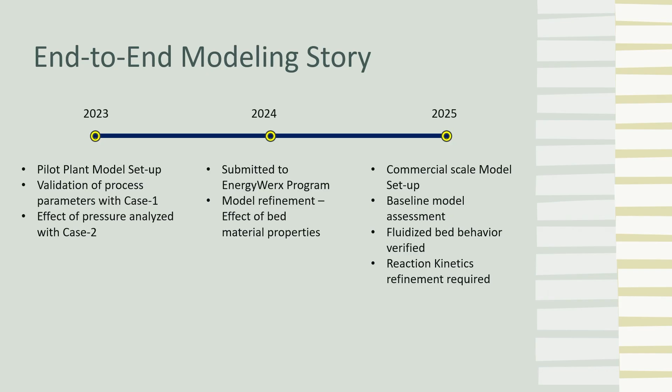And so there was a lot of model refinement, effect on the bed properties as they went through all this work. And now we've got to the point where we've got a reasonably good model of what we think that System 1000 looks like. But this talk is just sort of walk us through the process of what we did, how we did this, and what was the purpose of all this work that we put together.

So you may want to ask, why were we doing this? GTI has done these sorts of gasification plants for roughly 40 or 50 years. We have a lot of very basic knowledge of how it goes together. There's a lot of correlations from our friends at PSRI, who were part of GTI for the longest time. And this is technology that within GTI is very well known, and it's been established and it's been proven many, many times. What it becomes is a de-risking thing.

The question that we would always get from financiers is, show me that plant. Show me that 1,000-ton-a-day plant on biomass. Show me that 1,000-ton-a-day plant at 10 bar. We can't do that, but what we have is a lot of data around coal plants at 10 bar. We have a lot of data around coal biomass at smaller scale.

So using the work that we did here with CPFD, we're able to then begin building these models so that we can take these to the financial markets, partially as a scientific tool, partially as a marketing tool. They can start to see that what we know inherently about the systems, we can then model and we can validate these models and show that this is true.

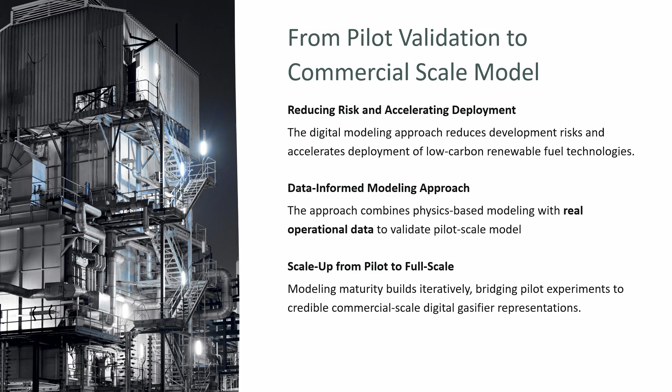So it was a data-informed modeling approach. We were using true operational data from heat mass balances from the work that we did at the pilot facility, and then we'd taken that to the scaling up of the overall full System 1000.

Okay, so why does this matter? So biomass gasification is very complex, as we saw with Eric. These are the same types of gasifiers. So I can say from our system, we're going through here, we're going into the POX system, and we're using an Arvos cooler. So I know very much what's going on between all these sorts of modeling that's happening here. This is the primary gasifier.

We're bringing in biomass. It can be highly variable on the chemical componentry side of it. There's a bed material in there that's acting as a big heat sink, bringing it in, heating that biomass up very quickly. A lot of reactions between devolatilization, drying, tar reforming, water gas shift.

I mean, we have a dozen or so reactions ourselves, not the 600 reactions that these guys are working on. But we're trying to just sort of do this very simply. We're more concerned about the hydrodynamics, the fluid dynamics of what's going on, but can we get the mixing right that makes things look more or less where they really should be?

And so that's where the benefits of the CPFD modeling are, is that we can actually visualize what's going on within the reactor. And does that make sense from what we have seen in the pilot facility and the data that we're getting there versus what we're seeing in the model, and does that all hang together so that we can say that the model is truly validated?

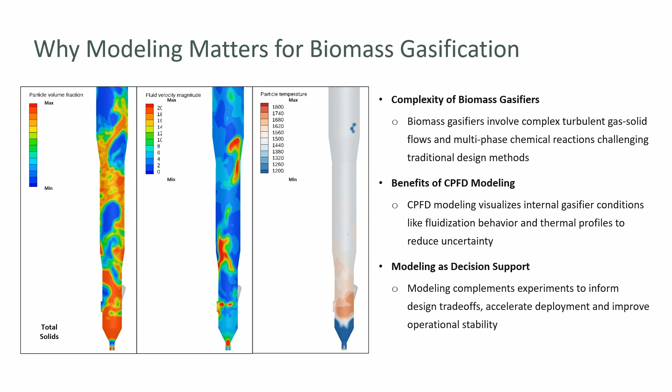So our first step in the pilot scale models, we had all the actual drawings from the construction of the pilot, all the fabrication drawings, so that we could transmit them to CPFD and they could build an actual model to the dimensions of what the pilot facility were, all the way down to where we introduced the gases in between our grid and our jet, and then we could actually simulate these things as close to reality as we possibly could.

Once we got there, we started looking at the simulations and try to get an idea of, do these things make sense? Do they make sense versus the data? Do they make sense from a standpoint of actually operating the pilot facility? Do they all sort of hang together? And we went through several iterations and looking at the data to calibrate these things, primarily around temperature, but also we do some data reduction of the bed itself and looking at the bed activity.

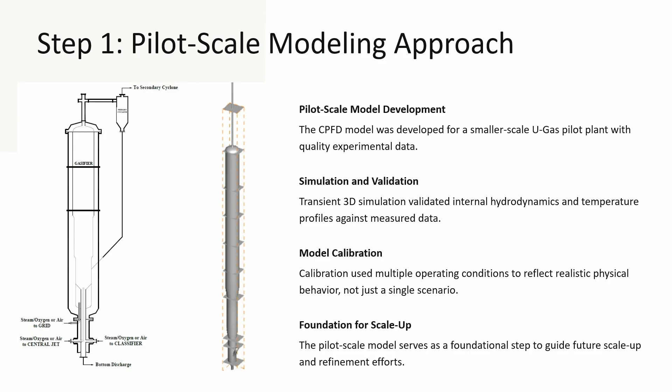And so this was the foundation for being able to scale up, is that we had a pilot model that was well calibrated. Our kinetics, like I said, were significantly smaller. We were primarily looking at a drying step, a devolatilization step, which is just sort of taking the gases out of the biomass that's there, some steam-carbon reactions, some reforming reactions, and water-gas shift, and maybe some Boudouard reactions.

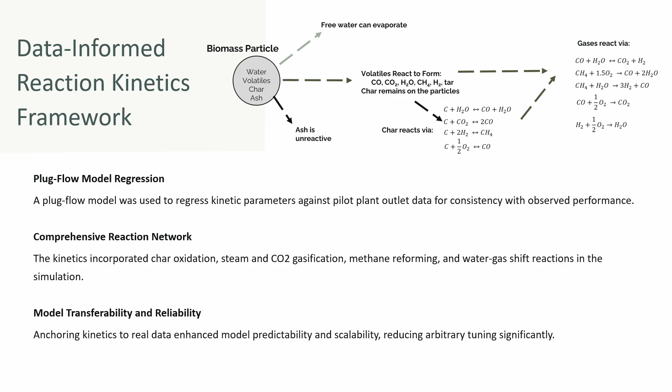So we tried to keep our data set relatively small, since we're primarily looking at the major gas species, and the tar is more of a gross number. We're not necessarily looking at individual species of tar, but do we have roughly the right amount of tar and the right amount of methane that's coming off of the system? And for us, that's good enough. We'll let our POX guys take care of the rest of that, and reforming everything to the total amount of syngas.

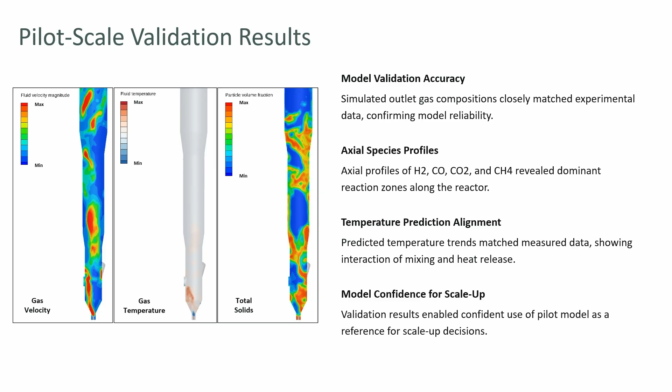So all of this tied together with the first model we took forward into looking at, this is the validation. And so looking at the velocity regimes, gas temperatures, and total solids within the system, and looking at the data, everything looked relatively reasonable as far as hanging together. So we were confident that we were able to go to the scale up from these sorts of works.

When we looked at the particle size distribution we had given them, it was a little heavy on the heavier side of the particles. And when we took a look at the actual pilot data from what came out of the reactor after the reactor had been running for a while, it was significantly different. So we modified the particle size distribution to what in the middle of the reaction period would look like, not necessarily at the beginning or at the end, but more in the middle.

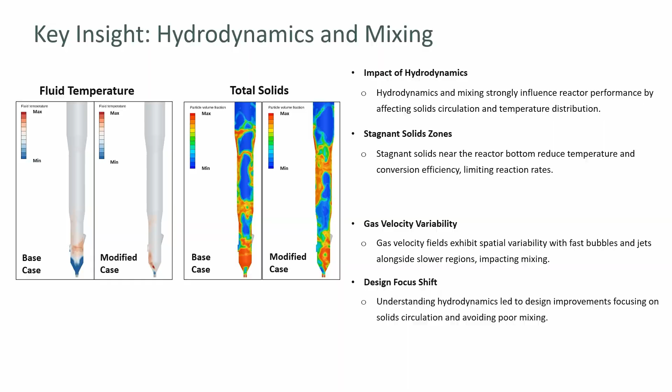So this is particle size distribution. It was highly sensitive to those particle sizes. As we modified them just slightly, we were able to get the better amounts of fluidization. It had a massive impact on the mixing and dispersion, the temperature uniformity, and as we adjusted that particle size to more along the lines of what it was really going to be within the reactor, it converged into more of what we would expect it to actually operate like.

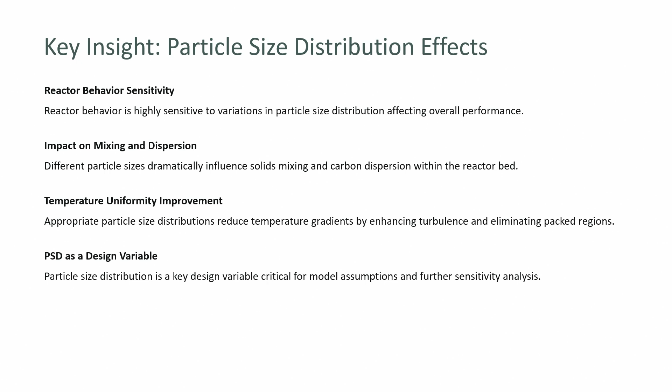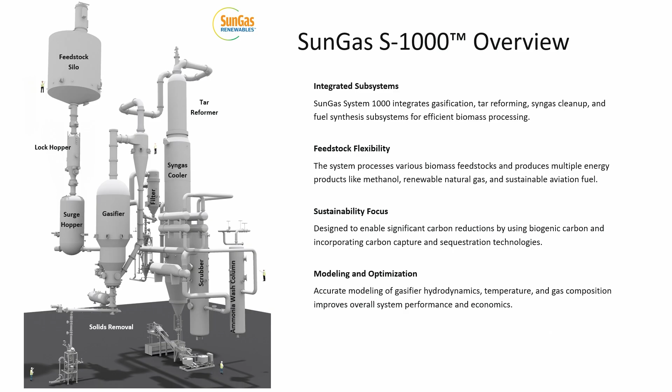The whole purpose of it is to be fully integrated with subsystems, feedstock flexibility, which the CFD modeling helps with as well. And we're sustainability focused, trying to stay primarily within the realm of biomass and waste. And the whole purpose of this modeling and optimization is to be able to show that not only do we have the pilot data, but we've also done simulations to the point where we're confident that this is going to be able to operate as we expect it to operate.

So as we transitioned from the pilot to the full scale, we had to take a look at the overall validation of things. We had to carry forward all the kinetic elements, and we had to take the structure and scale things up. So we had gone through a series of exercises looking at the larger scale unit. We've actually had fabrication drawings done. So we had a good idea of the dimensionality of the full scale system, putting that together with the fabrication drawings and then CPFD laying the grid network on top of the model.

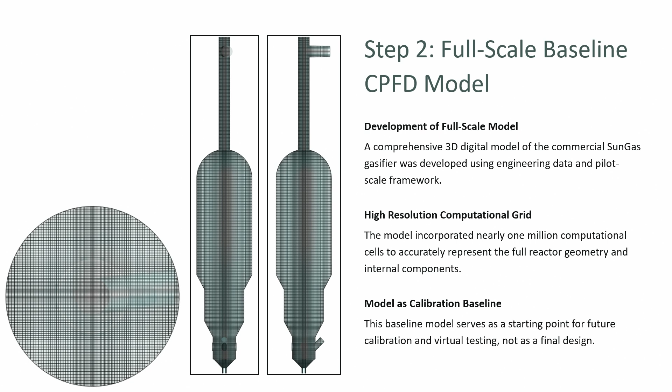And we were working with somewhere near 1 million cells on this thing, because it's a fairly large reactor, to make sure that we've got a good resolution of what was going on within the overall system. So we incorporated quite a few cells to get accuracy. The baseline model served as a starting point for the overall system. So we reused all the reactions, the kinetics of the system.

The assumptions were consistent. As we talked about, there were different reaction regimes: the drying, the devolatilization, and the reforming types of reactions. We kept those relatively consistent as we did the scale-up. The reliable scale comparison, again, keeping the geometry the same, keeping the velocities the same, the steam, the carbon ratios, the oxygen that was necessary to go into the system. Very similar to our own modeling outside of CFD for the actual process design of these systems, and it corresponded with what we were doing with CFD.

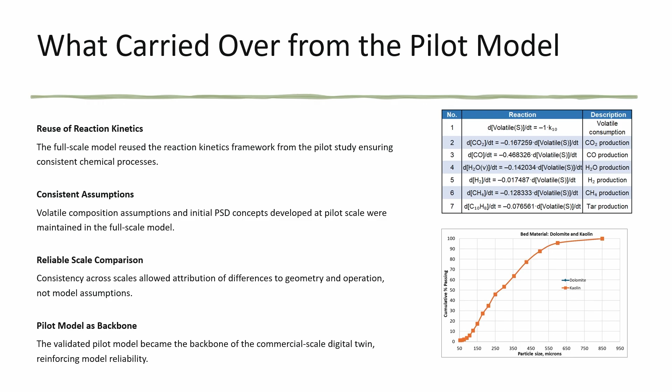You see here the particle size distribution and the reaction kinetics that we were working through as we were going up to the larger scale. As we got to the larger scale, we started seeing the action of what we call the jet in the center. We had another presentation about the ebullated, or spouting bed, a similar type of thing here. We do have a jet in the center that promotes a lot of this mixing. With the smaller pilot, you don't necessarily see this because of all the wall effects

in a significantly smaller reactor. On the right-hand side, though, you do start to see this jet, which is essentially pulling material from the sidewalls into the center area where you get the majority of your oxygen that allows the reactions to occur, and bringing those solids up into the upper freeboard area, where they cascade back down along the sides. And as the biomass is brought in from the sides, it helps sweep that biomass into the center, along with the grid, pulling everything to the center, so that we avoid gas bypassing around the outside of the reactor.

The other interesting thing as we got into this was looking at what's going on with all of the reaction zones and primarily the jet. The U-GAS reactor in its infancy was a slagging reactor, but it was a dry slagging reactor where it was trying to slag the very small particles of coal into like little BBs. The way we're operating the biomass gasifier, we don't want that. We want to try to keep the system as dry as possible.

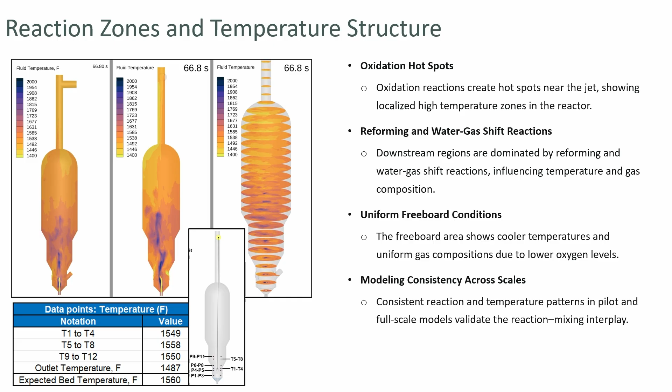So we do have a few remaining gaps. We have a lot of smaller areas within the reactor that we need to take a look at. Around the grid, I was just talking with one of our colleagues here at CPFD. They've rearranged the grid holes to match more closely the way that our reactor is going to operate. It's shown some interesting results in there. We need to take a look at these areas around here with the

Sorry about that, hold on, right.

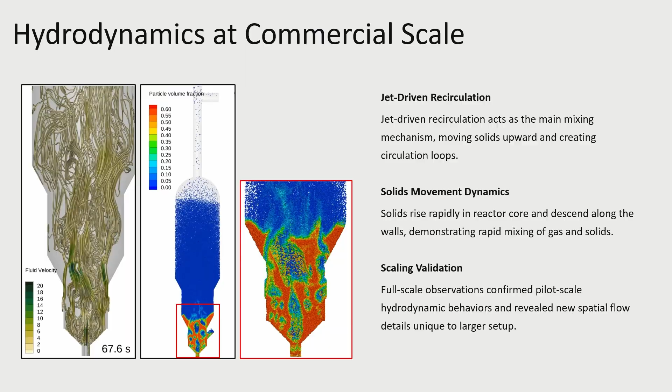These areas around the shoulders where we swage and go up to a larger diameter, we need to probably take a little bit closer look at those, and do we truly have dead zones there, or are they more active than maybe what we're seeing here on the reactor? As the reactor started up, it looked like it was a relatively light bed. It may have to be more dense than that. And those are the sorts of things, as we start to understand what the CPFD modeling is telling us and how we think the reactor is going to operate, we'll begin to be able to refine the model and get it closer to what we expect it to be.

There's still a few uncertainties in here, making sure that the kinetics, particle transient conditions, things like that, we'll have to continue to investigate those to make sure that they're being modeled properly. The bed material is always attriting. We're always adding bed material in. We're always taking bed material out. Those sorts of things have not been modeled into here, and that's going to take significantly more effort to get to that sort of level of modeling on this.

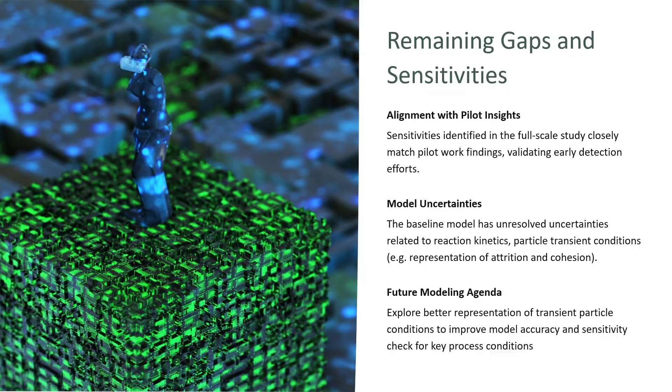And so that's kind of how we're taking this thing forward with CPFD, sort of piece by piece at a time, understand what we have, refine what we have, make sure that it's to a point where it's ready to move forward, and then we take it to the next step as we mature our process here. And so as people go through this modeling step, the best thing that you can do is have good lab data, experimental data that can then go in and inform your actual model, so that you're not having to guess at things, you're not having to go to books, you get something you can actually truly anchor this thing on.

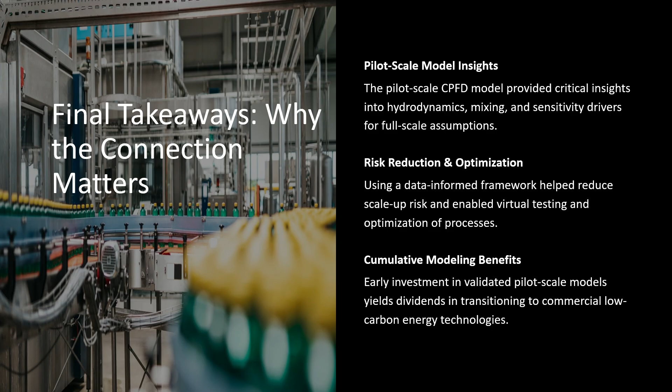Using it for risk reduction, optimization, and to help tell your story is a wonderful thing for these sorts of tools. And what we will find is that there will be a cumulative benefit of this as we get out into the marketplace even farther with these next projects. The investment community and their due diligence teams will put a lot of faith in these sorts of models and the fact that we can hang these back to actual data from the pilot facility. That's it.